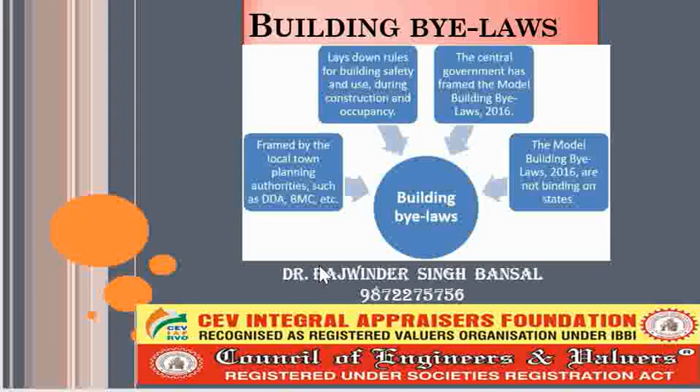The states can form their own building bylaws, but by and large, the base of the state's bylaws remains either the Model Building Bylaws 2016 or the National Building Code 2016. So these are formed by every state's local town planning authorities, such as DDA, BMC, etc.

So what are building bylaws? We will discuss certain things which are important from the building bylaws point of view. During planning and construction of any building, certain restrictions are laid down by the municipal bodies, urban development authorities, and other government departments such as town planning trusts, related to clear spaces to be left around the building, permissible height of the building, permissible construction area, etc.

So basically, building bylaws relate to how much space has to be left around the building, what should be the maximum permissible height of the building, what should be the maximum permissible construction area of the building, and other related things.

Hence, the proposed building plans, which are to be submitted to the local government authorities for approval, are to be prepared according to these bylaws, which are checked and approved by the above authorities.

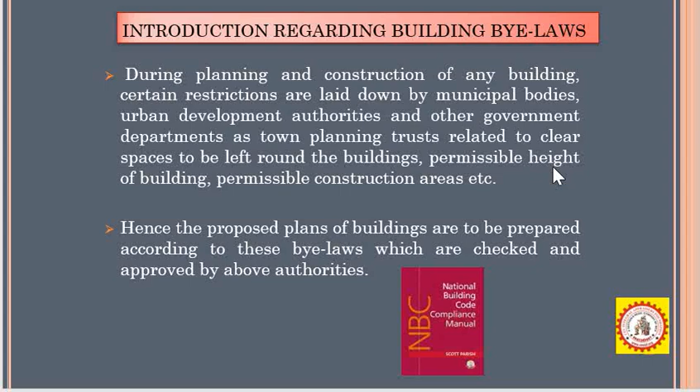So, minimum provisions in the National Building Code dealing with providing protection and safety of the public with regard to structural sufficiency, fire hazards, and health aspects are also called building bylaws. These things are to be considered, along with public safety with regard to structural sufficiency of the building, fire hazards and health aspects. These are basically given in the National Building Code 2016.

So building bylaws also cover aspects of administrative regulations, development control rules, general building requirements regarding materials and structural design, rules for electrical installation, lighting, air conditioning, and lifts, regulations for ventilation, acoustics, and plumbing services such as water supply, drainage, sanitation, and gas supply, safety measures for workers and public during construction, requirement for green belts and landscaping, special requirements for low income group housing, and rules for erection of sign and outdoor display structures.

So each and everything related to the construction of the building is covered under building bylaws, as you see from this paragraph.

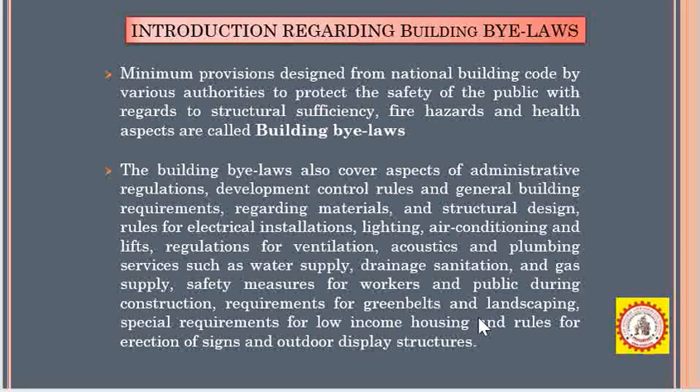So what are the objectives of building bylaws? The first objective is that building bylaws allow disciplined growth of buildings and towns and prevent haphazard development. Building bylaws protect the safety of the public against fire, noise, health hazards, and structural failure. They provide utilization of space, hence maximum efficiency in planning can be derived from these bylaws.

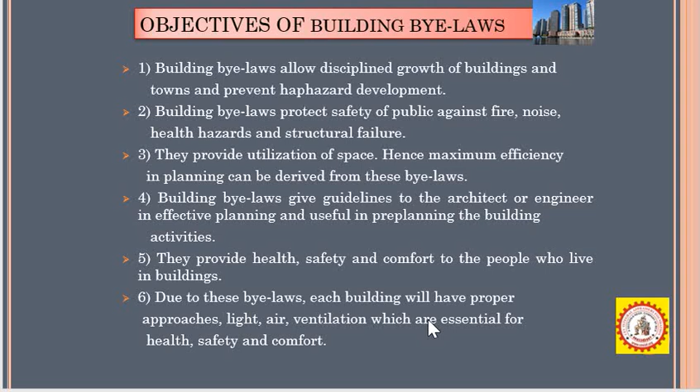Building bylaws give guidelines to the architect and engineer in effective planning and are useful in pre-planning the building activities. They provide health, safety, and comfort to the people who live in the building. And due to the bylaws, each building has proper approaches, light, air, and ventilation, which are essential for health, safety, and comfort of the inhabitants.

So, what are the aspects covered in building bylaws? These include building frontage line, built up area of the building, height of the building, open spaces to be left in the sides, backs, etc. Provisions regarding the size, height, and ventilation of the rooms and apartments, provision of water supply and disposal of wastewater, other sanitary provisions, and structural design of the building for its safety.

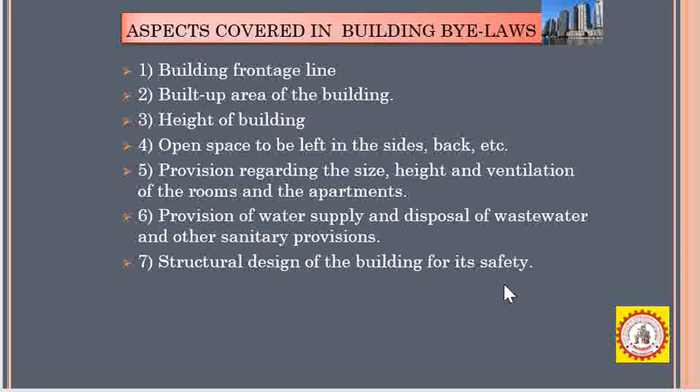So, what is a building line? A building line is laid in each case parallel to the plot boundaries by the local authority, beyond which nothing can be constructed towards the plot boundaries. It means you have to leave a certain area from the road where no construction is allowed. So this is basically the building line.

So as per the rules of the building bylaws of the local authorities, this is a line beyond which nothing can be constructed towards the plot boundaries. You cannot construct anything in this area.

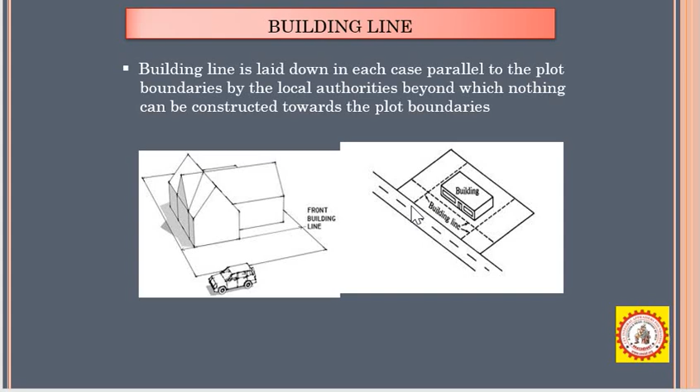Certain buildings like cinemas, business centers, and factories attract a large number of people and vehicles. As such, more space is required. Hence, the building should be set back a further distance away from the building line. The line which accounts for this extra margin is called the control line.

The fixation of building line depends upon the site of the proposed building, keeping in view the present width and future widening requirements. So basically, in case of general buildings, residential buildings, etc., we call this area from the center line of the road, some distance is to be left where no construction is allowed.

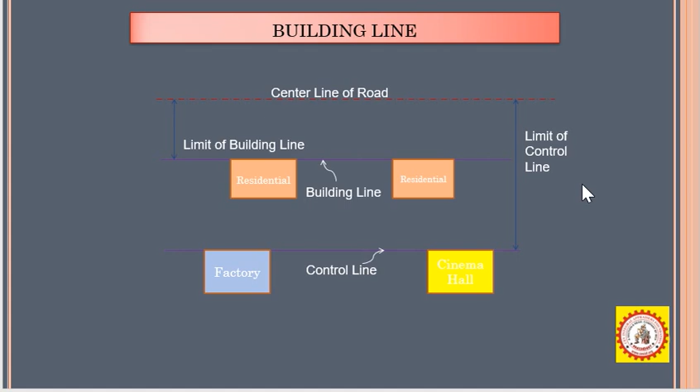That is called the building line. But in the second case, in factories or cinema halls where more people live or work, this distance is increased. In case of residential buildings, this is called the building line, and in case of other buildings, it is called the limit of control, or the control line.

As far as building line and control line are concerned, generally on national highways and state highways, building line is 30 meters and control line is 45 meters. On major district roads, building line is 15 meters and control line is 24 meters. On other district roads and village roads, building line is 9 meters and control line is 15 meters.

This is useful for your day-to-day work, to check when you are doing valuation on plots situated on national highways, state highways, major district roads, or other district roads—these distances are to be maintained.

In this distance from the center line of the road, no construction is allowed except gardening, etc. This is also called the distance where no construction is allowed.

A setback may be defined as a frontage margin or open space in front of the abutting street or road. So this is the distance on the front margin, or open space in front of the abutting street or road. This is called setback.

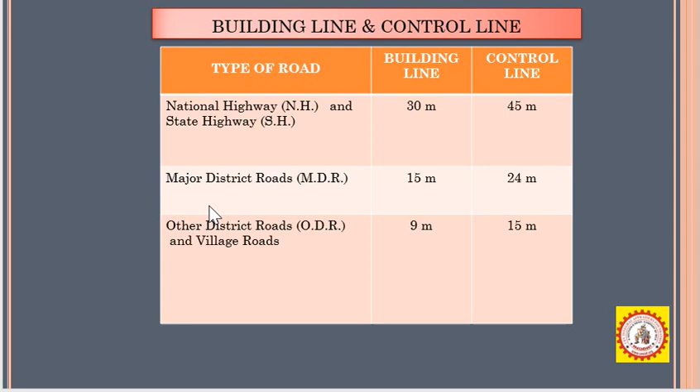In other cases, we use the term setback. Setback is the distance in which no construction is allowed by the local authorities. From the front, it is called front setback; from the sides, it is called side setback; and from the rear, it is called rear setback.

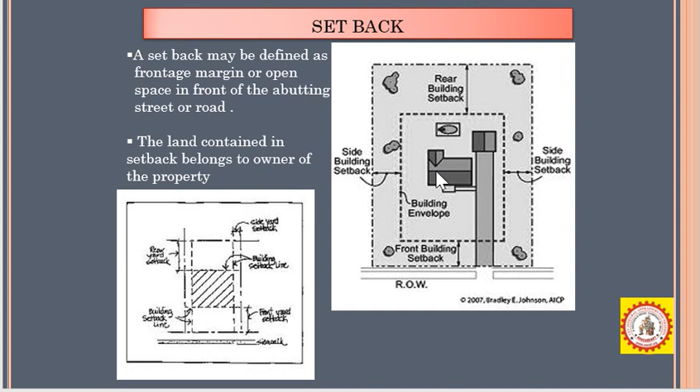You must know all these things as a valuer, as an architect, or as an engineer. These are the things you should know: what is front setback, what is rear setback, what is side setback, and this is the portion where you can do construction.

These are all given in the code, the National Building Code or building bylaws of the state—what should be the minimum front setback, what should be the minimum rear setback, and what should be the side setback.

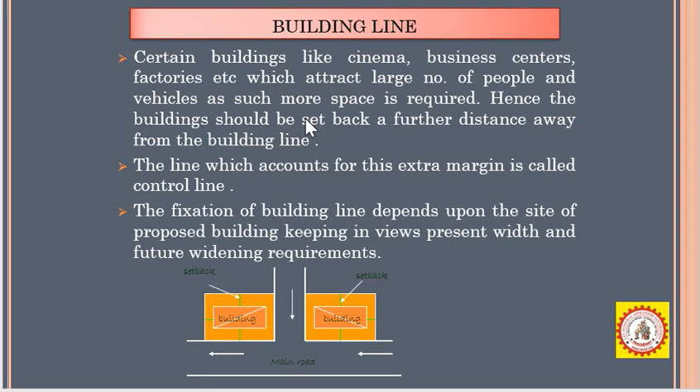What are the advantages of building line and setback? Part of the setback may be acquired for the purpose of widening of roads. In case of road widening, certain areas may be acquired by the government. If construction is done there, you will not get anything for the constructed part, so it becomes easier for the government to acquire the land.

If the setback is uniform, buildings are constructed in one line parallel to the axis of the road, resulting in improvement of the road. Provision of setbacks also results in better conditions of air, light, and ventilation for the building—from where you can get better air, better light, better ventilation.

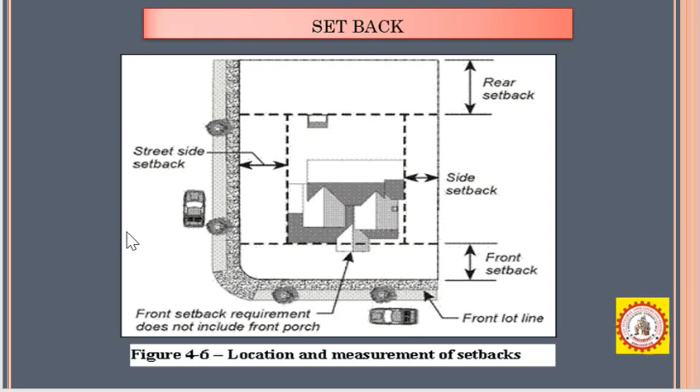Setback at street corners improves visibility and imparts safety to traffic. On corner plots, this type of setback is provided so that visibility is better—vehicles on either side will be able to see any coming vehicle from the other side.

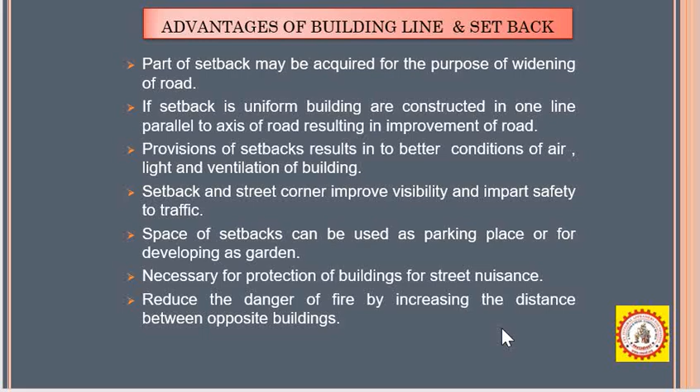Provision of setbacks results in better air, light, and ventilation, and improves visibility and safety at street corners. The space of setback can be used as a parking place or developed as a garden, and it's necessary for protection of the building from street nuisance. It also reduces the danger of fire by increasing the distance between opposite buildings.

Then, what is the height of the building? The height of the building is the vertical distance.

So what is the height of a building? The height of the building is measured from the highest point to the lowest point on the road, if it's a building like this. We take the midpoint from the road, and similarly this is the peak of the ridge and this is the ridge line, then we take the midpoint, and that vertical distance will be the height of the building. So the vertical distance from the average grade of a building or structure, or for a wing or distinct portion of it, to the highest point of the roof for that wing or portion, is referred to as the height of the building.

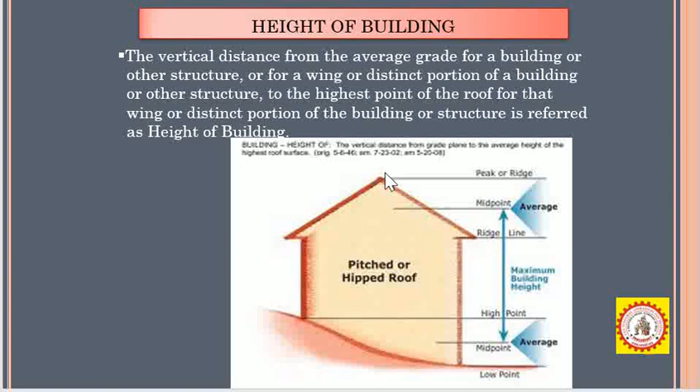The maximum height of the building depends upon the width of the street on which the building fronts, the minimum width of the rear space, and vicinity of aerodromes. If the width of the street is 8 meters, the height should not be more than 1.5 times the street width, so the maximum height can be 12 meters. If the street width is 8 to 12 meters, the maximum height cannot be more than 12 meters. If it is above 12 meters, it should not be more than the street width, and not more than 21 meters. So it can either equal the width of the street if that is more than 12 meters, or at maximum it can be 21 meters.

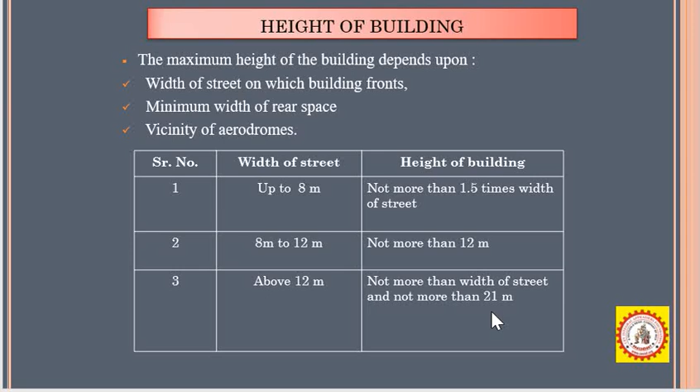So this is the height of the building and how it is to be measured. We have already discussed that. Then what is carpet area?

As the name suggests, carpet area is the area where we can spread a carpet, meaning the area calculated from inner wall to wall distance inside the house. This would also include steps if any are inside the house. So essentially, carpet area is nothing but the net usable area inside the house.

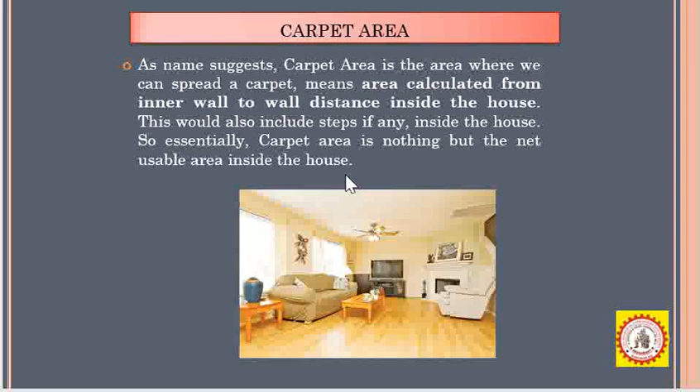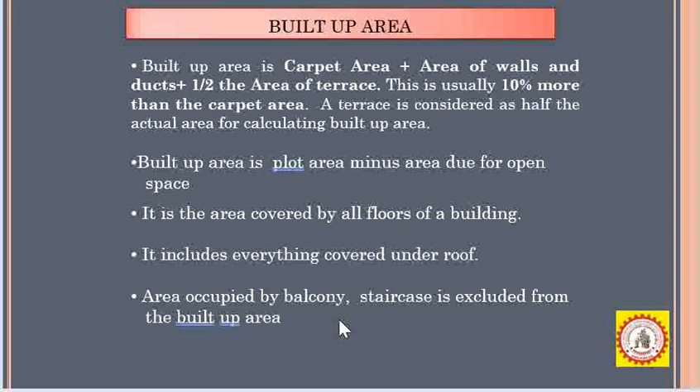But what is built up area? Built up area is carpet area plus the area of the walls, and this is generally 10% more than the carpet area. A terrace is considered as half of its actual area when calculating built up area. So built up area is plot area minus area set aside for open spaces. It is the area covered by all floors of the building, and includes everything covered under the roof. Area occupied by balconies or staircases is excluded from the built up area. You have to remember this, balcony area or staircase area is not included in the built up area.

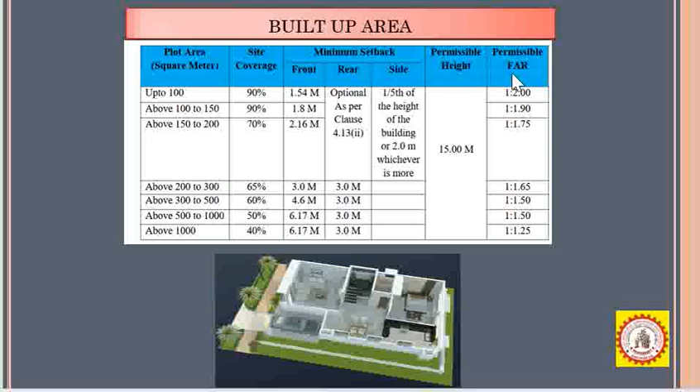As far as built up area is concerned, every state gives the maximum and minimum permissible limits in their building bylaws. For example, up to 100 square meters, maximum plot coverage is 90%, above 100 to 150 it is 90%. This is what you can get from the building bylaws of the state. Permissible height and permissible FAR are also given in the building bylaws.

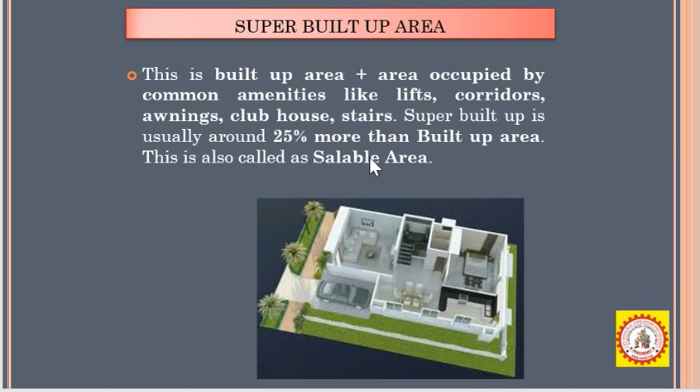So what is super built up area? This is built up area plus the area occupied by common amenities like lifts, corridors, clubhouse, and staircase. Super built up area is usually 25% more than built up area. This is also called saleable area.

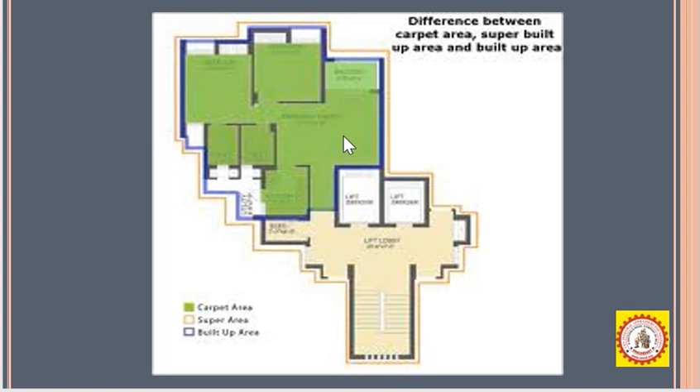From this figure, you can see what super built up area is, everything, every area, is included in it. This diagram gives you what carpet area is. This color shows carpet area, this color shows super area with these lines, and this line shows built up area. So see the difference between carpet area, super built up area, and built up area.

So covered area or plinth area at the ground level, how can you calculate that? It is the ground area covered by the building immediately above the plinth level, but it does not include the space covered by the compound wall, gate, canopy, uncovered cantilever staircase which is open on at least three sides and also open to the sky, area covered by chhaja up to 18 inches for all kinds of buildings except commercial buildings, cantilevered porch, portico, or slide.

Also excluded are swings and extensions like garden, rockery, well structures, plant nursery, water pool, swimming pool if uncovered, platform around a tree, tank, fountain, bench, chabutra with open top and unenclosed by walls on the sides, drainage culvert, conduit, catch pit, gully pit, chamber, gutter, and similar features like cantilever roof projections up to 3 feet projected from the finished level of the wall, to the extent of a maximum 50% of the circumference of the covered area at each floor.

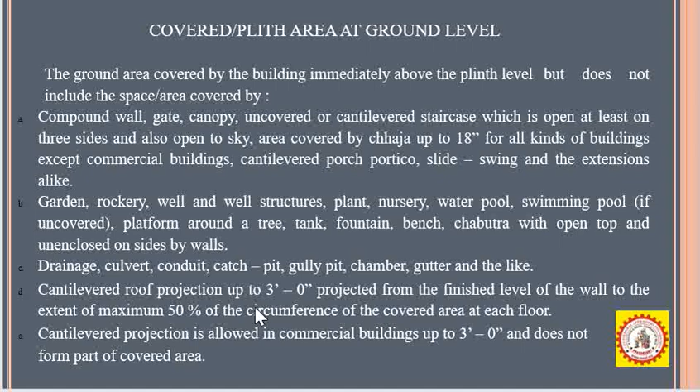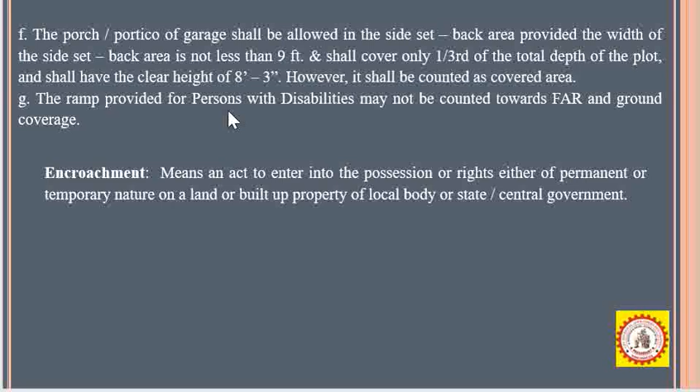Cantilever projection is allowed in commercial buildings up to 3 feet and does not form part of the covered area. Porch or portico of a garage shall be allowed in the side setback area, provided the width of the side setback area is not less than 9 feet, and shall cover only one third of the total depth of the plot, with a clear height of 8 feet 3 inches. However, it shall be counted as covered area. The ramp provided for persons with disability may not be counted towards FAR and ground coverage.

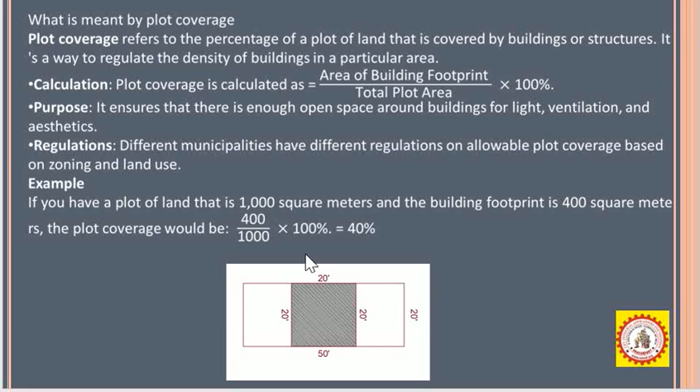So what is plot coverage? See here, this is a plot of 20 feet by 50 feet, on which you have constructed a building of 20 feet by 20 feet. So the total covered or built-up area is 400 square feet, and the total area of the plot is 20 by 50, which is 1000 square feet. If you calculate this, plot coverage is 40%, meaning the maximum area you have covered is 40%. This is plot coverage.

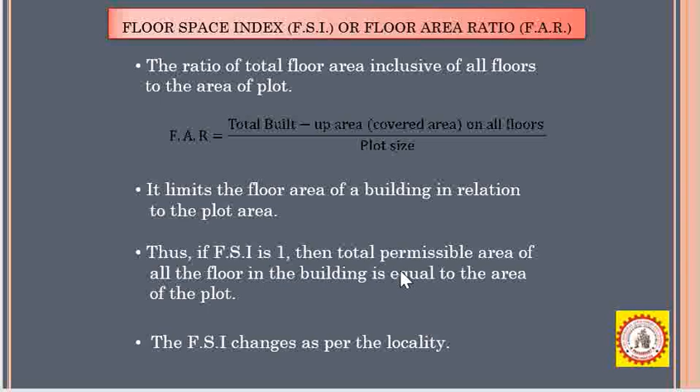So what is floor space index or floor area ratio? It is the ratio of total floor area, inclusive of all floors, to the area of the plot. So FAR is basically total built-up area covered on all floors divided by plot size. It limits the floor area of the building in relation to the plot area. Thus, if FSI is 1, it means the total permissible area of all floors of the building should be equal to the area of the plot. FSI changes as per the locality.

Open space requirements: why are open spaces required? These are required for lighting, ventilation, future expansion, approaches and access to common amenities like water supply and drainage lines, and future widening of streets.

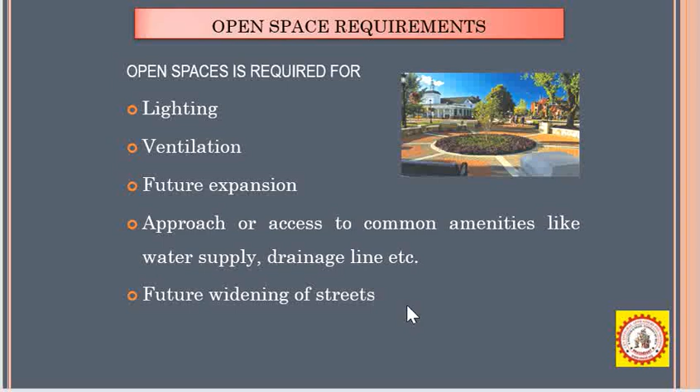Open space is also required for front, rear, and side yards depending upon the height of the building, and can be calculated by the formula: width of open space around the building in meters equals 3 plus h minus 10, divided by 3, where h is the height of the building in meters, if it is less than 25 meters.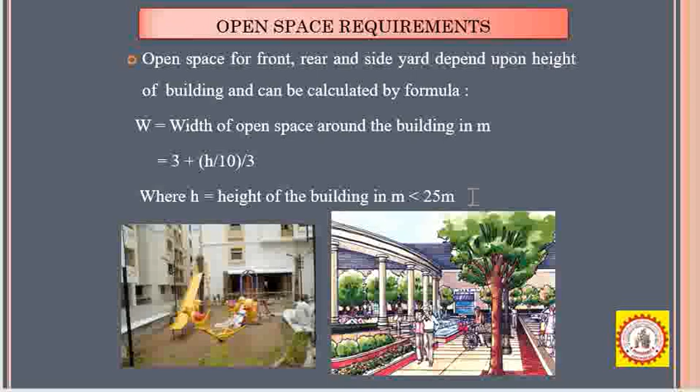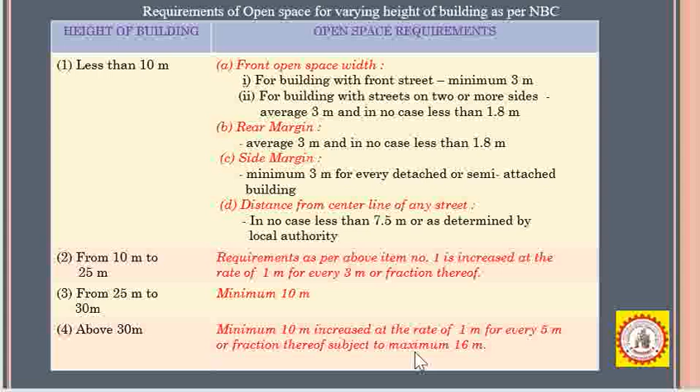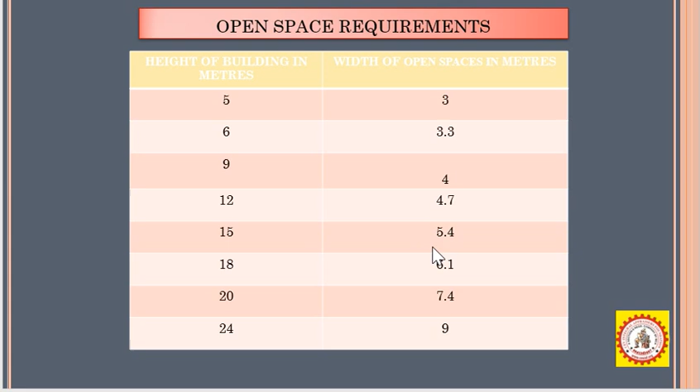So for open space requirements, height of the building in meters and width of the open space in meters: if height is 5 meters, open space is 3 meters; if 6 meters, it is 3.3 meters; if height is 9 meters, open space is 4 meters. And so on, you can check it from this table.

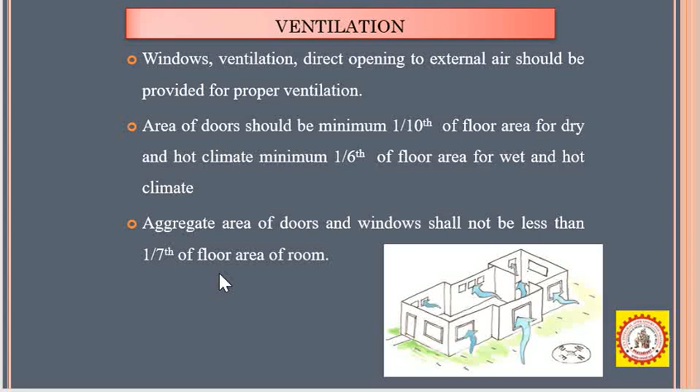Then what is ventilation? Windows and direct openings to external air should be provided for proper ventilation. Area of the door should be minimum 1/10th of the floor area for dry and hot climate, minimum 1/6th of the floor area for wet and hot climate, and the aggregate area of doors and windows shall not be less than 1/7th of the floor area.

So this is all about building bylaws. For more details, you can check the building bylaws of your state, or better, you can check the Model Building Bylaws 2016 along with the National Building Code 2016, which also includes structural details and other things required for the building.